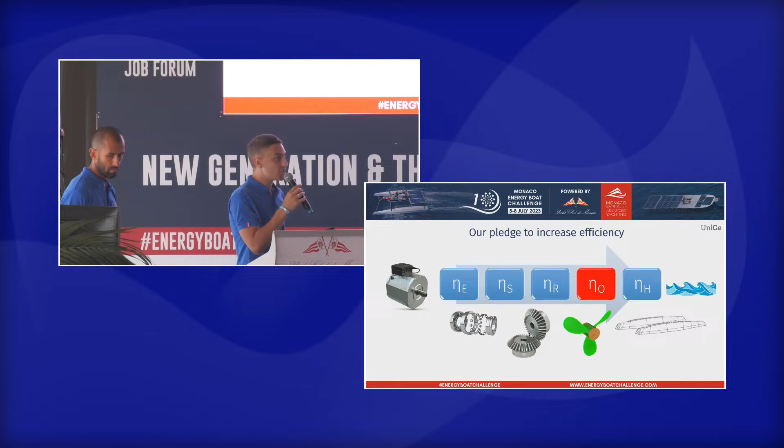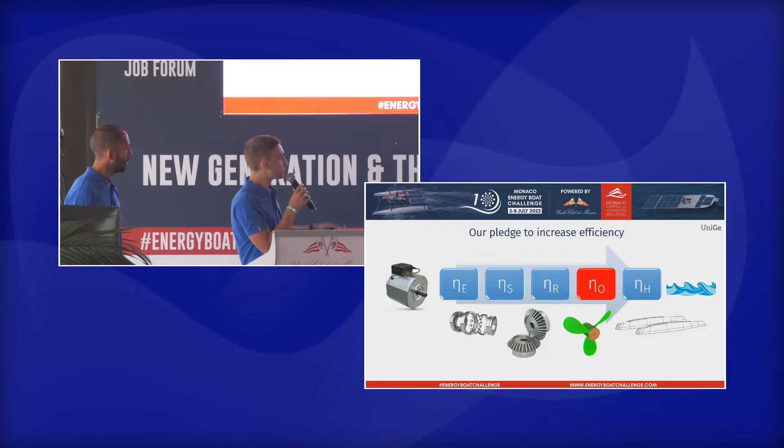About this is the classical chain of efficiency, starting from the efficiency of the motor down to the efficiency of the propeller, and then the efficiency of the hulls. So the weak link of this chain is for sure the efficiency of the propeller. And so we decided to work a lot on that, because improving the lowest efficiency can bring up the overall efficiency. This is just some details of the communication system.

Then we had some tests. I will skip that because I have no time. And then the problems. Well, it is our first participation, so we had lack of time, lack of organization. And lack of time means we had no time to properly fix our mistakes and our failures. 2 batteries out of 5 broke down. The shaft line design and production took longer than expected.

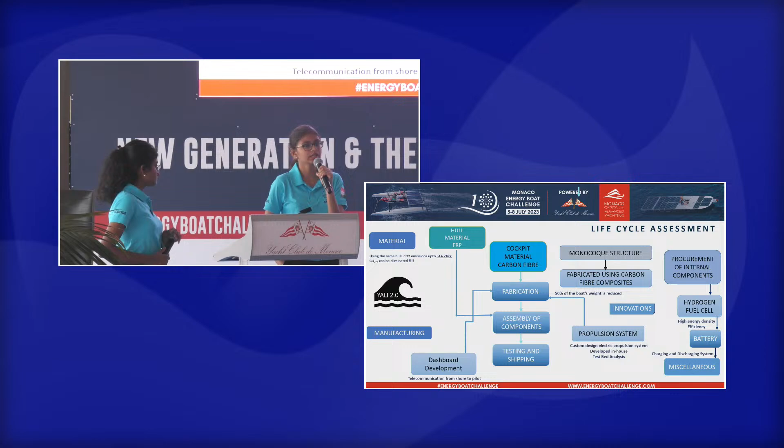About the internal components, the battery, once it is bought, can be used for many other applications. And the hydrogen fuel cell is the only hydrogen conceptual product we have designed in our institution; it's the first project we have developed. So that goes under our research and development and can be used for study purposes by the students too. And about the propulsion system, the custom designed high-speed electric propulsion system is being commercialized.

Sorry, I just put my remote in my pocket. Yeah. Sorry. Excuse me. Okay. Okay, we are already running out of time.

So we incorporated some ecological features into the boat. We have completely manufactured the seat out of natural fibers, jute and hemp, and it had a maximum tensile strength of 148 megapascals, and it weighed under 2.5 kgs. And the innovative, no.

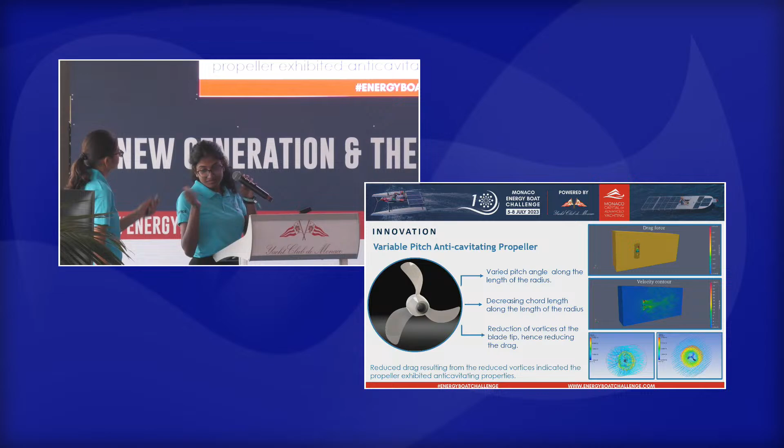It's okay, ladies, I'm sorry, but I was supposed to check the bell, but the next one will have that. Thank you so much for the presentation. Do we have some questions on the stage? Julie?

Yes, for 1% power, was it worth adding the solar panels? Sorry, can you come again? For only 1% electrical power, was it worth adding solar panels? Actually, complying with the rules of the Energy Boat Challenge, we had to go with a secondary source of energy. But I think the battery and the hydrogen were actually sufficient for us to comply with the challenge. So yeah, the 1% is a minor part of the whole energy on board. Did I answer your question? No. Okay. Other question?

I do have one question. Sorry, I'm very oriented to Tech Talks. Did you have a look at all the documents from previous years shared by the Yacht Club of Monaco in order to prepare your boat? How was it useful? Did you have some good ideas coming out of it, or did you have some orientation that you would not have taken without it?

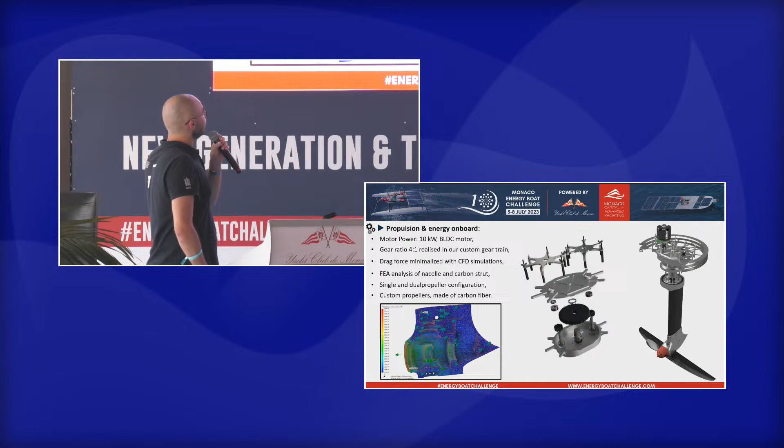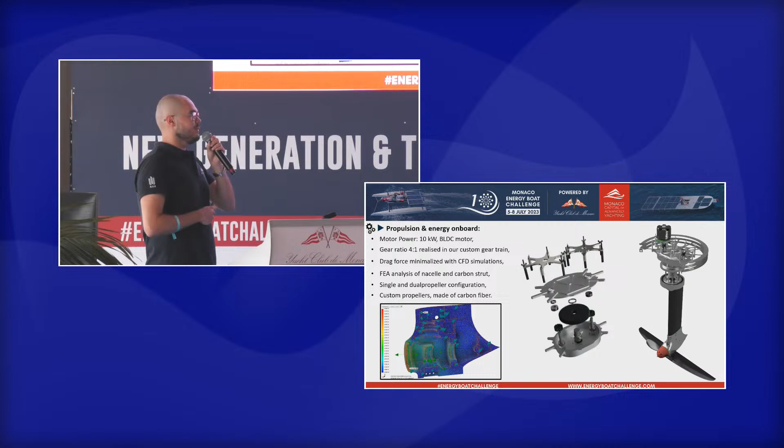Our propulsion system was built to be as universal as possible, to develop it through the years. It was meant to use 2 BLDC motors, which can be used simultaneously. Also, we've done some FEM simulations to calculate the stresses on the nacelle. As you can see on the render, we have an aluminum nacelle and a carbon fiber strut.

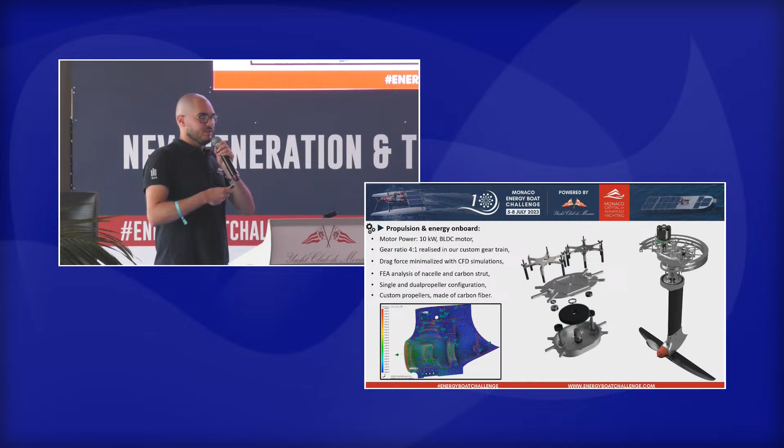The hull was made with the goal to be as lightweight and as strong as possible. It's made of carbon fiber with aramid honeycomb inside. And we are really happy about the result because the hull and deck weigh just above 40 kilograms. Also, we've done FEA simulations to calculate the stresses and places where we need more carbon fiber layers.

The cost of Celka was around 50,000 euros, and to come here to Monaco from Poland, we estimated the cost of 2,000 euros. We built Celka 2 years ago, in May 2021. Our main innovation this season is a new foil steering system. The goal was to make it foil on the sea in Monaco and to be as strong and lightweight as possible.

The impact of the innovation: we've calculated that when foiling, we have around 2 times less energy consumption than a non-foiling boat. The struts are made entirely of carbon fiber. In our workshop, we've also done CNC machined molds to layer them. And we calculated, again using CFD and FEA simulations, for them to be as lightweight and as small as possible.

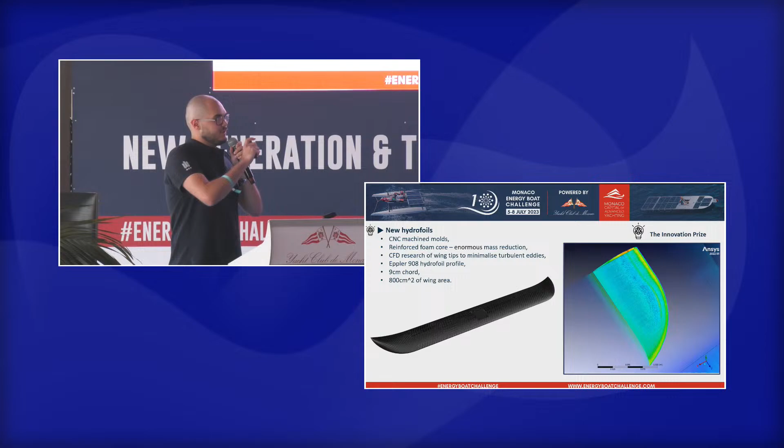Our new hydrofoils for the new steering system are made of carbon fiber with foam inside, so they are really lightweight. They can even float on the water. And we also calculated the tips to be as efficient as possible. As you can see on the CFD contour, the contour represents the kinetic energy losses.

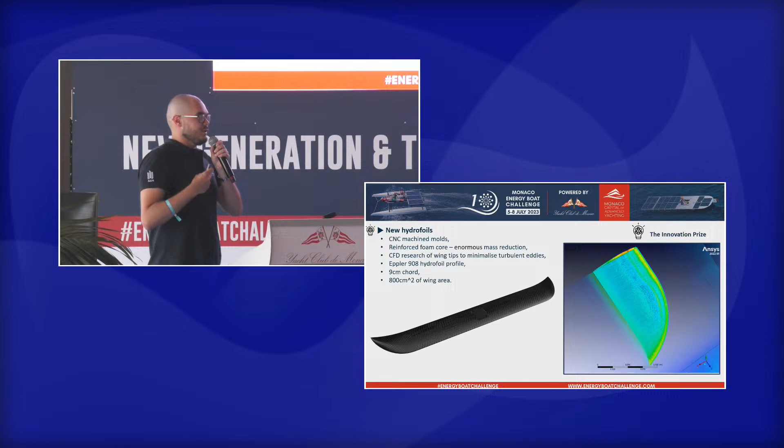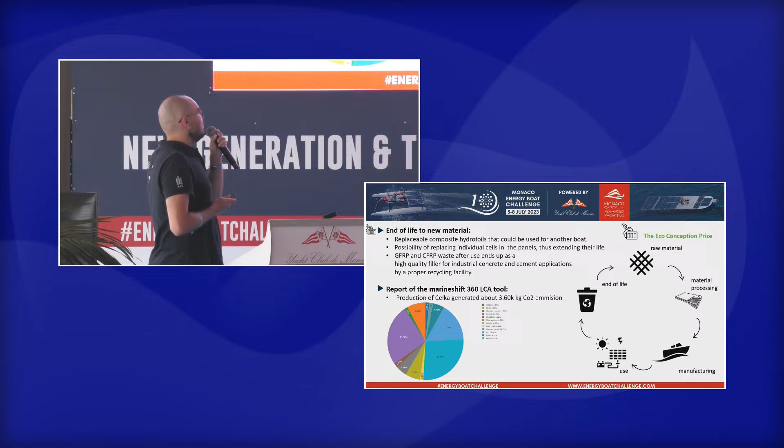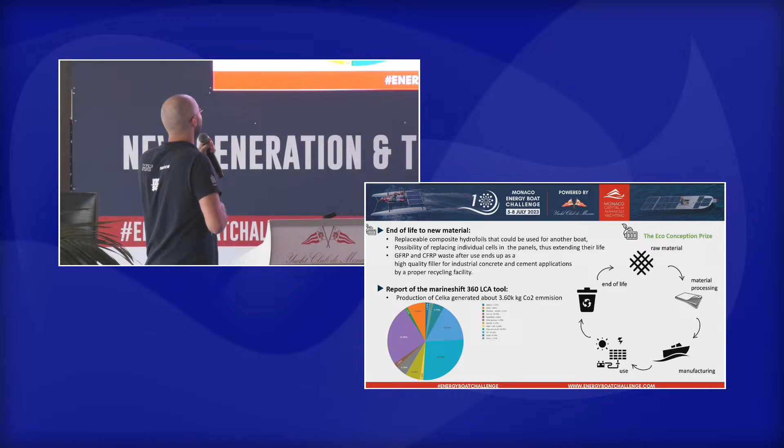We are really trying to be as responsible for the environment as we can. As you can see on the graph, the building of Celka cost around 3.6 thousand kilograms of carbon dioxide emissions. We calculated that after we built Celka, because it's this year's calculation. And surely when we build the next boat, we will calculate it to be as low as possible.

As I said, we really care about the environment, and to make that possible, we take cooling water for the engine from the sea outside. We get it with our pumps and then return it to the sea, so there aren't any oils or other materials needed. Also, we've built our custom battery accumulator, which is better and more efficient than the ones we can buy.

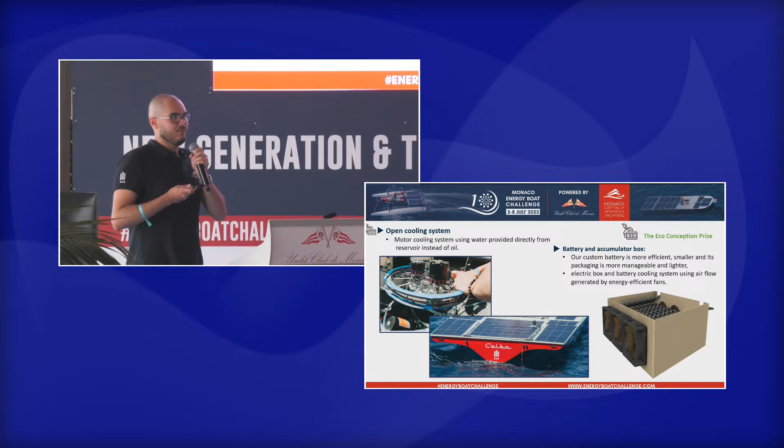Also, we're making our own PV panels, which are more efficient and especially more lightweight than the ones we can buy, so Celka isn't that heavy. They are really efficient. We buy cells that are 21.4% efficient. And thank you.

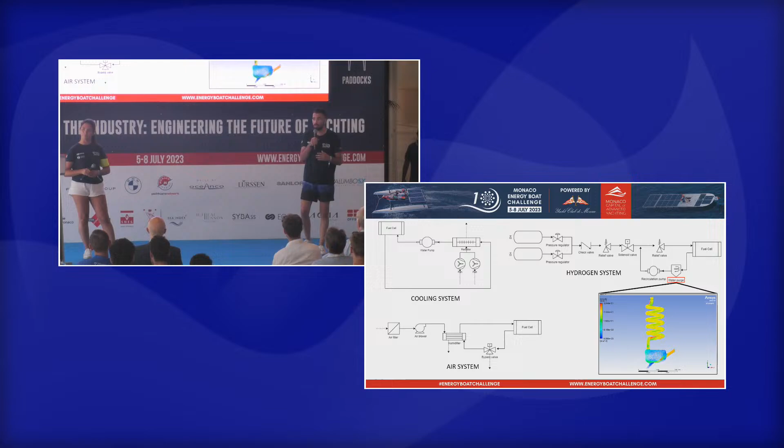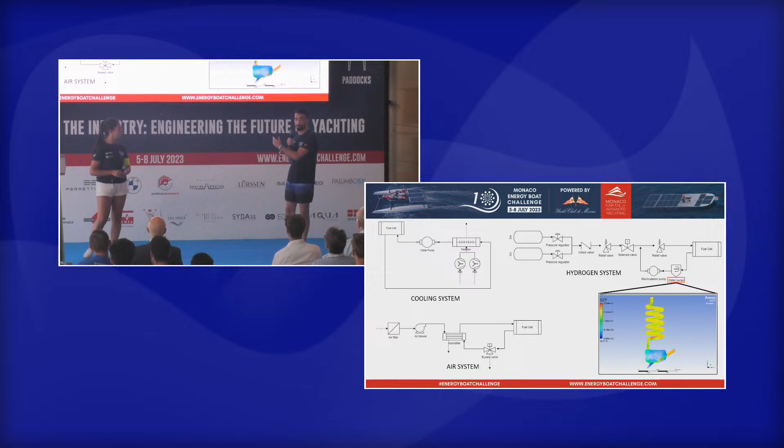Okay, so behind me, as you can see, we have here all our fuel cell systems, but I want to bring your focus to a specific part, the recirculation hydrogen system. Last year we brought to you our homemade water purge that purges the water from the recirculated hydrogen. But we knew that we could improve it, we knew that we could do better, so we did.

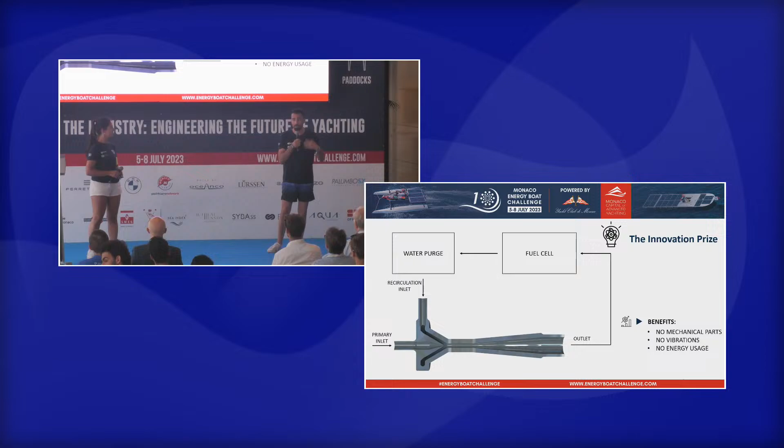I'm very glad to present you our innovation, the Venturi injector. The first thing that you may be asking is, what is a Venturi injector? Okay, so a Venturi injector is just like a recirculation pump, but with 3 major benefits. First, it doesn't have any mechanical parts, it doesn't vibrate, and it doesn't use any type of energy. You may be thinking, okay, this looks like magic, but it's just physics and the Venturi principle.

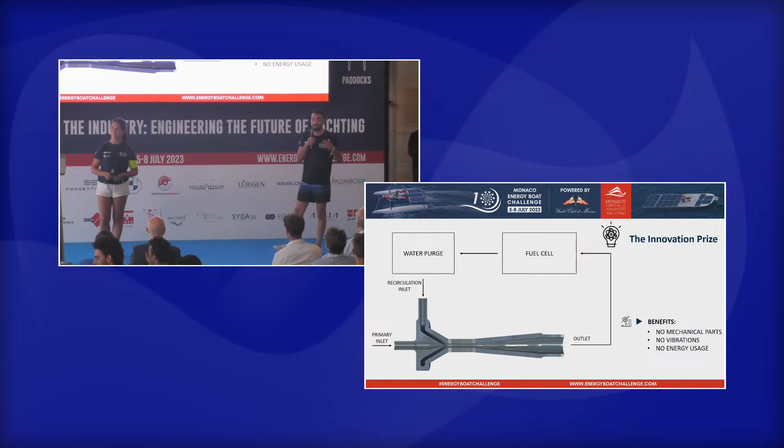The hydrogen comes in the primary inlet from the tanks, and then it gets accelerated in the nozzle. It creates a differential pressure that sucks the hydrogen from the recirculation inlet, goes all of it to the outlet, into the fuel cell inlet, and then this cycle repeats all over again.

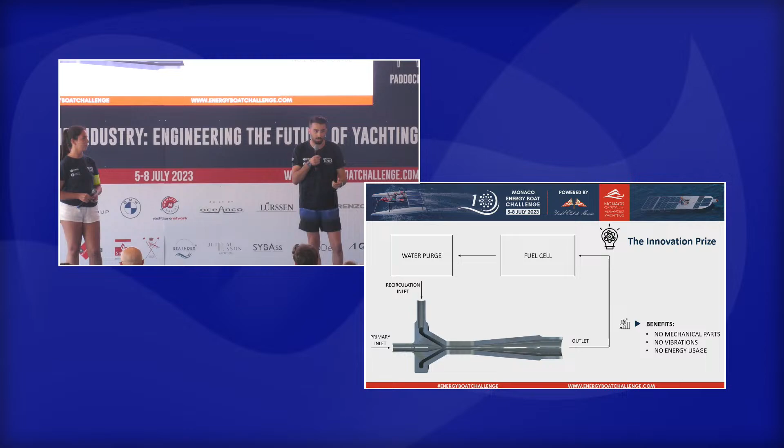Okay, but with a project like this, it took us a very long time and many problems. We faced 2 major problems: backflow and assembly. Backflow is just when the hydrogen from the inlet goes into the recirculation inlet, and this can damage the fuel cell and break our systems. We tried to solve this with a lot of CFDs and a lot of research to come up with a perfect size Venturi injector for our system and for our fuel cell.

The assembly part, we tried to 3D print it in just one piece in resin, so it's much easier to assemble. It's just to connect the tubes and we are done. Here you also can see a time lapse of all our prototypes. As I said to you, we did a lot of CFDs and then we tried experimentally.

I'm very glad to announce that we obtained only 50% error between the experimental data and the theoretical data. This doesn't look like much, but imagine this. All the other papers and all the other research that we found obtained something like 60 to 70% error, so 50% I would say is a very good result.

Well, a little bit about our eco-conception prize, because our main goal with this boat was to have it as ecological as it could be. So what's best to evaluate that than to use the basic 3R rule. So after some research, we opted for using flax fiber instead of carbon fiber. We used PET core instead of PVC core, and we also used a bio-based resin.

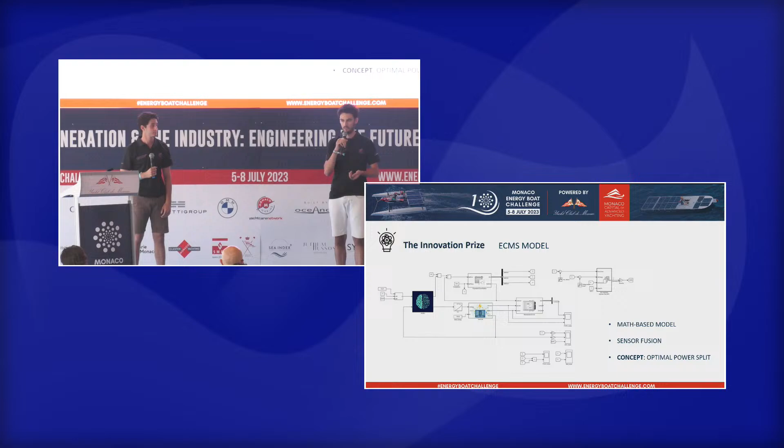So this year, our team is competing for both prizes, the Innovation Prize and the Eco-Conception Prize, because we believe that sustainability and innovation are 2 concepts that, especially at this point in time, cannot go without each other. For the Innovation Prize, this year we present an Intelligent Power Management System based on the Equivalent Consumption Minimization Strategy, or ECMS. This is a math-based strategy which optimizes the power split between the fuel cell and the battery by minimizing a function of 2 variables: the hydrogen consumption, so basically finding the best efficiency point for the fuel cell, and the derivative of the state of charge.

From there, we use what is called sensor fusion, which means that we can evaluate if it is better to use data coming from sensors or data coming from the output of the calculation, with what is called an extended Kalman filter algorithm. This isn't a new strategy. Actually, it is already used in the automotive industry, especially in hybrid cars. But what we did is integrate it with the dynamics of hydrogen and the dynamics of the fuel cell. So basically, we combined the benefits of 2 existing technologies in order to obtain ever more optimized solutions.

Okay, now let's talk about the Eco-Conception Prize. Materials are at the core of our project, and in collaboration with Lati, we developed 2 filaments for 3D printing with bio-based nylon from castor oil and recycled PETG matrices, reinforced with 10% recycled short carbon fiber. Then for 2 years we have used basalt fiber, replacing carbon and glass fiber, for our last year's cockpit, and we took a new approach with a forged basalt, with short basalt fiber from GS4C and a 3D printed PLA mold.

This is the result of the life cycle assessment of our vessel, and we didn't consider the impact of our cockpit because it was made last year, and this is an LCA study of this season. But still, we calculated the impact of our basalt fiber cockpit by considering 3 different scenarios: basalt, carbon, and flax fiber cockpits. Considering that the cockpit must have a specific mechanical strength, and it has been made by vacuum infusion, the quantities of basalt, carbon, and flax fibers are different depending on the scenario. So finally, we deduced that basalt fiber has been the best environmental solution for our project.

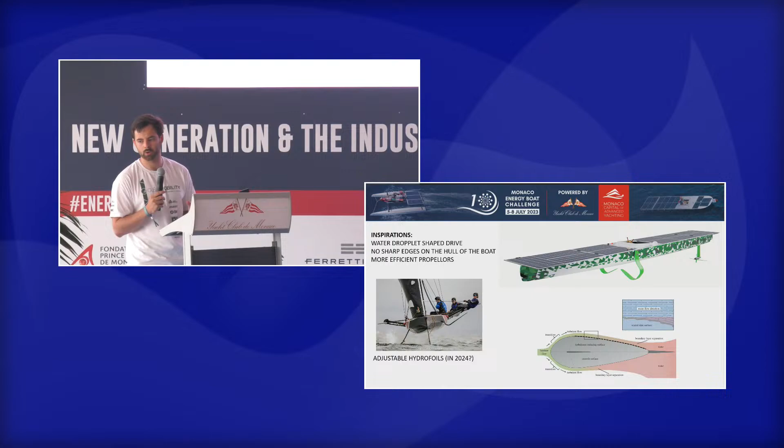So our inspirations: well, this is our hull that we've been using for several years now. And we're trying to get the boat on hydrofoils as well. We're experimenting with 2 types. One, we have the J type that's shown on the picture. That's a static one right now. We're still trying to make it work as best as possible. However, we're also trying to make do with the T type of foil. We're actually contemplating if we can make those T-foils adjustable. Hopefully it will be coming next year.

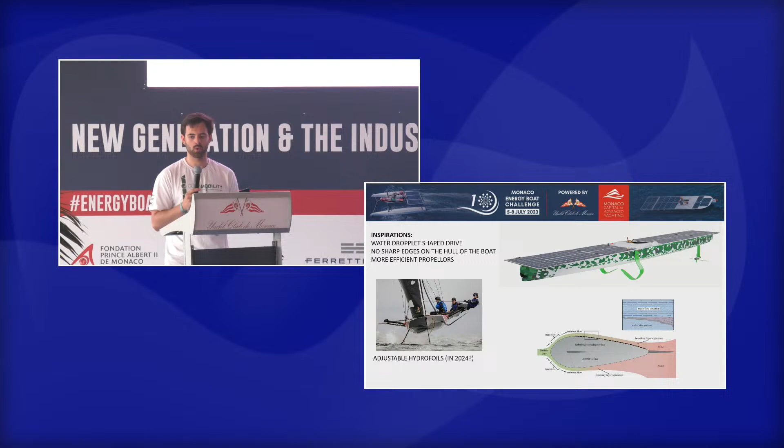What we also have is a fairly long boat design, because we were not made for speed and maneuverability, but more for durability or long-distance routes. Then the hull shape as well as the foils are, as previously mentioned, more of a non-sharp-edged design, and some of them are indeed inspired by the previously mentioned somewhat teardrop form.

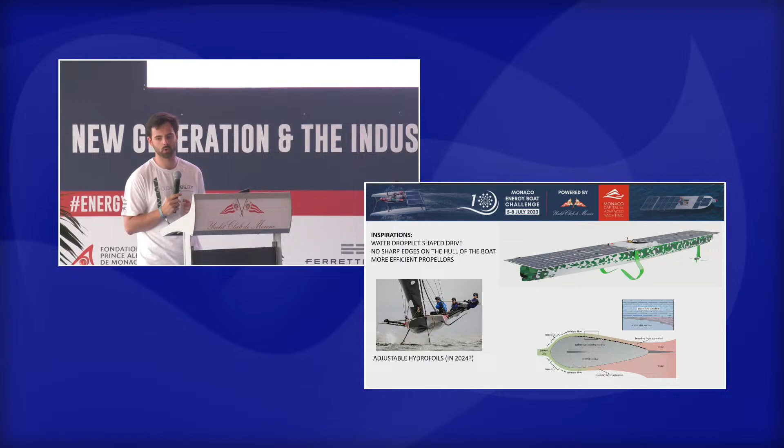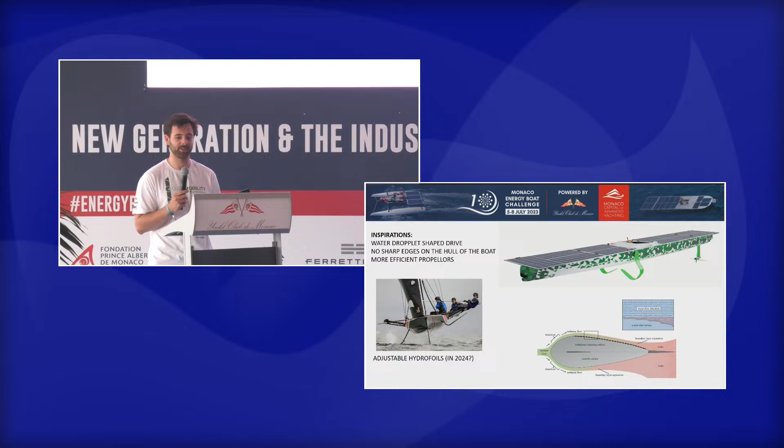And this year we have experimented with some prop designs as well to make them more efficient. We are actually printing our propellers in-house, carbon printing, I believe. And this year, with the tests we've done, we ran it today on our new propellers as well. They're not the fastest yet, but they do have a bit more efficiency than the previous ones. However, we are still trying to improve them a bit more so we can get up to a higher speed for the foils that we want to fly on.

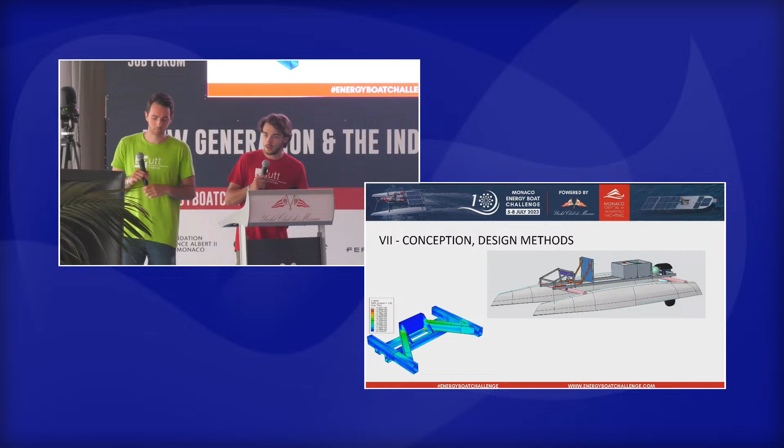Another big part of our project was some simulations for the weakest part of our boat. The thing that could break the most easily is the motor support. We did some simulations on ANSYS and Abaqus. Here we can see the results. This is the optimal design that we found, with aluminum tubes and just a wooden support in the middle.

So for our life cycle assessment, we have 9.5 tons of CO2 emitted in the total of the project. The most harmful is the transport towards Monaco. We came here with 3 cars and a trailer. And the most polluting elements of the boat would be the batteries, the motor, and then the aluminum.

So for the eco design, we opted for the simplest structure possible. We used aluminum tubes that use 70% recycled aluminum, and aluminum is recyclable indefinitely. And we also tried to give a second life to some seats, and we reused some materials to construct some small parts of the boat.

And finally, we just want to say that we are very happy to be here after 4 nerve-wracking days with some problems that we did not expect. We passed our technical inspection just about an hour ago, and with a lot of hard work from the team and a very responsive team to every problem, we are now able to compete tomorrow.

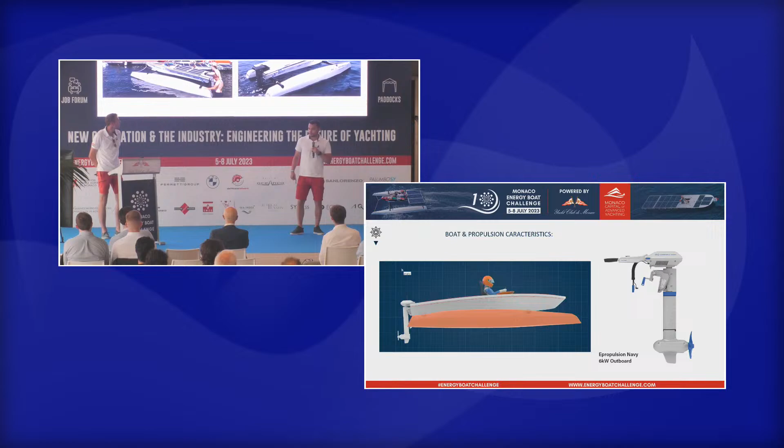Our association has many projects, including an electric bike, an autonomous vessel, and a solar boat. But this year is the first time that we are presenting our energy class boat. This is our boat, Malavitra. It's a monocoque design powered by an ePropulsion lithium iron phosphate battery with 8.9 kilowatt-hours, and it's located in the back along with all the electronics. We are using an ePropulsion engine with 6 kilowatt power. We custom-made the propeller, so it's a 3-fin high-pitch propeller made out of carbon fiber.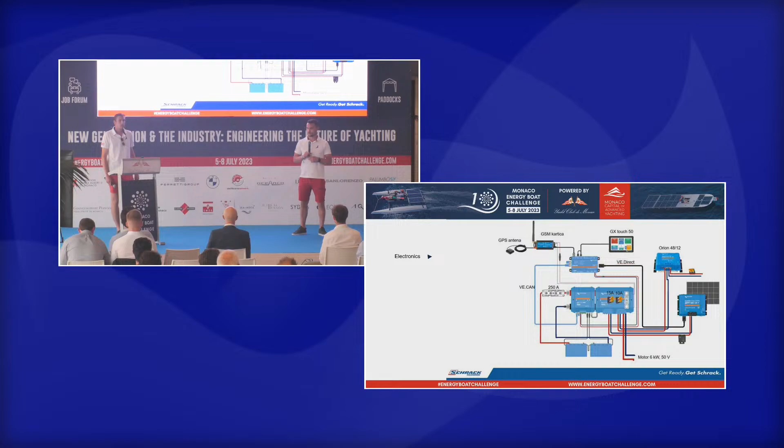Next slide. This is our electronics, made from 4 modules from Victron Electronics. We have a BMS that controls the charging and discharging of the battery and overall condition of the battery. The MPPT collects the energy that comes from the solar panels, and through the BMS charges the battery. We have a DC-DC converter used for powering up our relays, fans, and also the telemetry system. The telemetry system is connected to a GSM card, so through the cellular network we can get all the telemetry information onshore, and also a GPS antenna, so we can know where our boat is at all times.

So for the production, we had a lot of problems manufacturing the whole of the cockpit. First, we used the carbon fiber, 245 grams per square meter in 2 layers, and Soric core made of polyester, and we thought it would be excellent, but we had problems with the manufacture of the mold. So the mold wasn't completely made to the end, so we had to improvise.

The main problem was the air leaking inside. So when we got our hull out, it was pretty porous, filled with air. So when we tested it, when the pilot entered it, it cracked. So we reinforced it with 3 more fibers. So the cockpit is a bit overweight, but we are satisfied now because it's pretty hard and robust.

Here is the time-lapse video of producing vacuum infusion for the hull. The 3D design and the calculation was made in the MaxSurf program, the 3D modeling was made in SolidWorks, and the 3D visualization was made by the company called Via Cornell, and thank them for that.

For our marine shift, when we use the LCA tool, I actually figured out that it's reported that we got a lot of waste, which is basically true, but not true because we like to recycle things for three main reasons. It's cheap, we do something good for the environment, and we get the materials pretty fast.

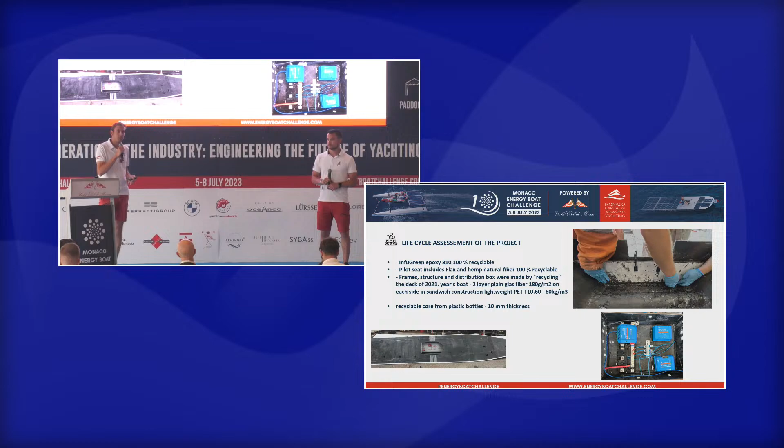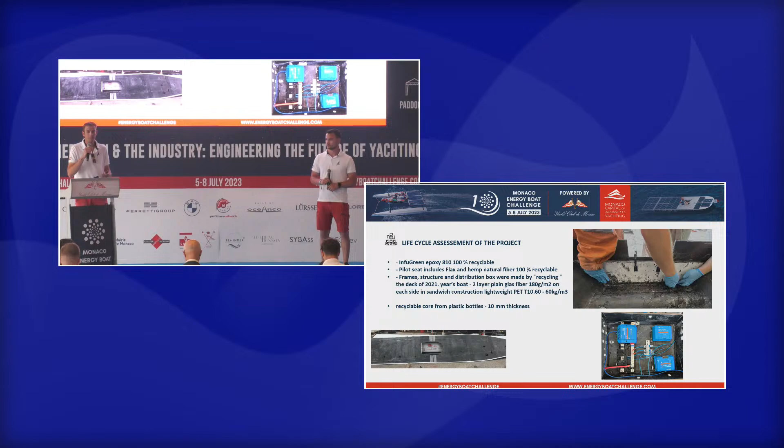In 2021, it was our first time here with the solar class, and the boat Delta One was made out of polyester, actually fiberglass. And so we thought it would be good for making reinforcements for our energy boat. We used it to make the bulkheads, reinforcements, and even the distribution box. We also cut the motor holder to reinforce the motor mount for this year's boat.

Questions? Congratulations to you and to all the ones who stayed, because I know it's a bit long, so thank you for that. Do we have some questions on the stage? Yes, one.

The design of your cockpit seems closer to a hull from a boat and is really different from the design of other teams. What was the main idea behind it? Well, it was pretty easy to produce because we had only one compartment, and it looks fast. It looks pretty nice, you know. We love the way it looks. I hope that I answered your question.

It is wonderful, but is it good for aerodynamics? We thought that, and we will see. Actually, it acted very well today. It reached 12 knots. Our main idea was to go with 2 e-propulsion motors, but it was very heavy. So probably next year, if we compete in the energy class, we will make some modifications or make 2 compartments, like every other team does, with the battery on the back and a small cockpit for the driver.

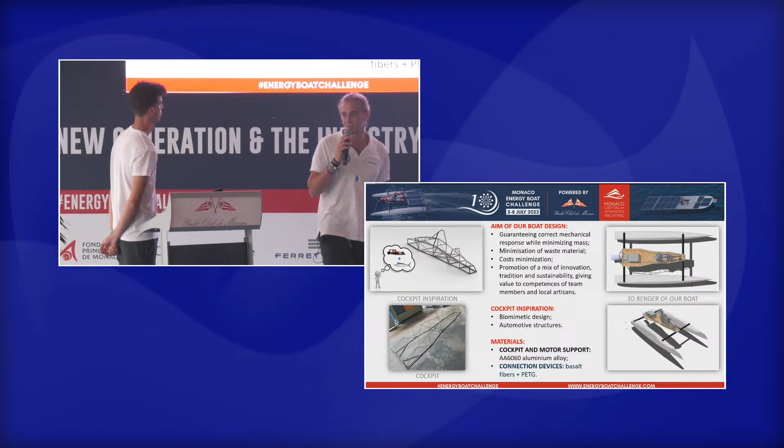So we have like a Dyneema cord that steers the boat. As I said before, we take the inspiration from the Formula sidecar. It's a really strong structure, an alloy structure, and is quite light, so you can even lift the whole cockpit with a finger. So it's a really, really low weight cockpit.

After that, I can say to you that we used the numerical system to try to design the boat. So we learned in 7 months how to use the Siemens suite, the ANSYS suite, and everything works properly. Last but not least, there are a lot of numbers. I don't want to bore you with all the data of the boat, but as you can see, we have the production and budget, which is quite low. We didn't expect that it's that low.

And we have the data about the energy on board. We have a 9.5 kilowatt lithium battery and a 15 kilowatt electric propulsion system. Finally, the propeller. In this case, we see one of our 2 propellers. We have 2 propellers that we can choose based on the race. So in this case, you can see the 4-blade propeller, and there is the data. So if you have any questions, I can answer them.

Thank you. Do we have some questions? You mentioned that you had 2 propellers. What's the difference between them? Yeah, so one of the propellers is a 4-blade propeller, the one that you see in this photo, with that data. And the other one is a 3-blade propeller. We chose these because one is for the endurance race, which is most efficient, and the other one is a more accelerating propeller. So it's the best to use in the acceleration race when we need power to go fast. Thank you. You're welcome. Other questions?

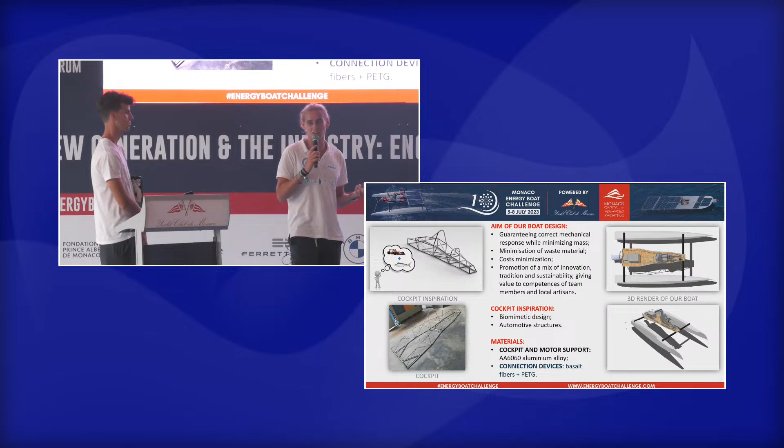Thank you for that. And could you also please share with the other teams where your throttle is? How do you manage the gas of your boat, the acceleration? Okay, the acceleration is a new type of method. Maybe in this render you can see it. We have a pedal, like a car. So the driver doesn't need to take his hands from the steering wheel. He can hold both hands on the wheel and accelerate with the foot. So it's the best thing in a slalom race, because you have to steer really fast and you can't leave your hand from the wheel. Thank you so much.

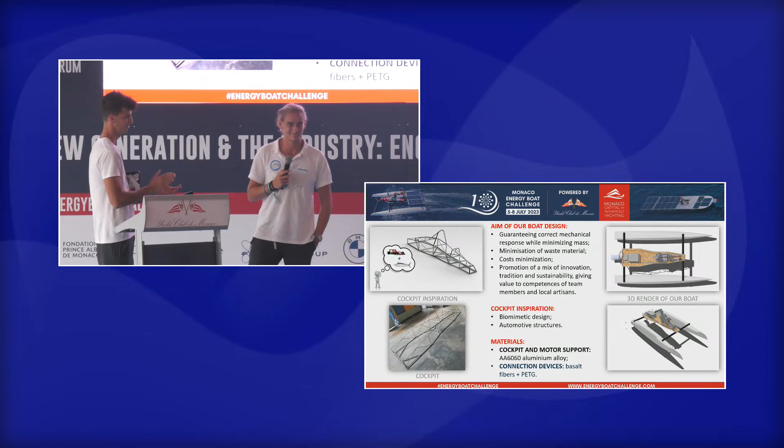Sorry, we have another one. Excuse me. I was wondering about the pedal you just mentioned. How does it behave in the waves? Because here in Monaco there are a lot of waves, is it a problem to steer your boat with the waves and the pedal? Okay, so it's all in the hands of our pilot. We didn't have enough time to think how to improve that. But our pilot learned a lot in the Strait of Messina, because there you have a lot of current and a lot of changes of current. So maybe he could manage that situation.